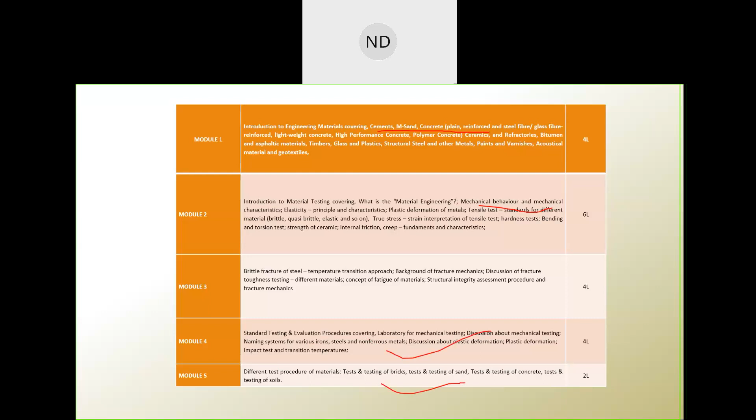Okay. So, wait, somebody is there in the lobby.

Okay. So, in the introduction, I have already said that in your first module we are going to discuss different materials which are used for construction, right? So, since in the first module we are going to discuss different materials, where is this thing?

Why it's not coming? Yeah.

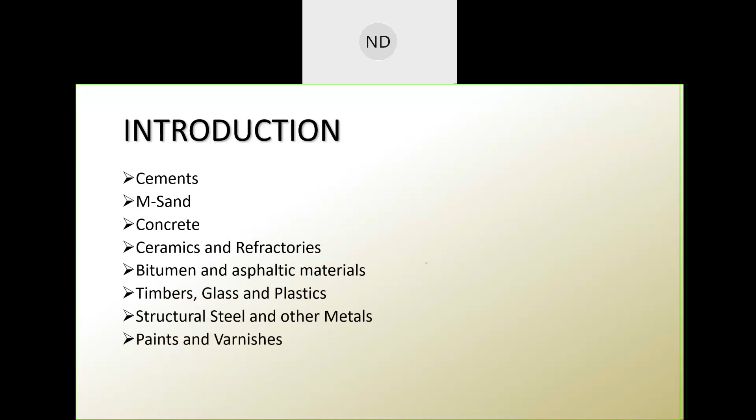So different materials like cement, where we will be talking firstly about cements, then M-Sand, concrete, ceramics and refractories, bitumen and asphaltic materials, timbers, glass, plastics, structural steel and other metals. Then we are going to talk also about paints, varnishes, acoustical materials and geotextiles. In the first chapter, materials, the first material which we are going to talk about is what? Your cement. So let me remove this.

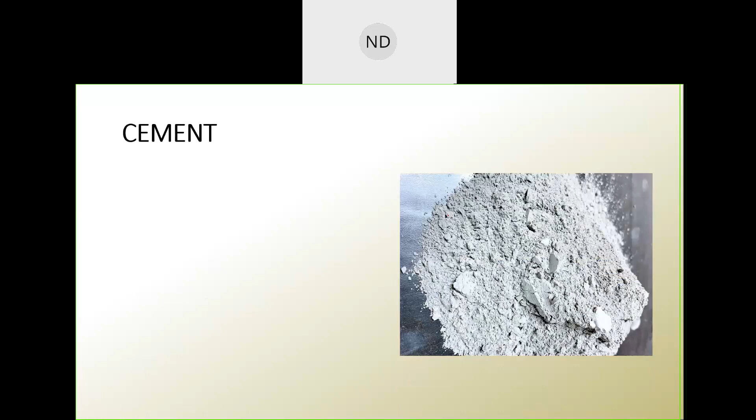So this is your cement. Being a civil engineer, you already know about cement, but we'll go in depth. What is a cement? Cement is a binding material, you already know from your labs also, which makes a bond between aggregates and reinforcing materials, between your steel and other materials, the mortar. With the development of technology, the quality and the types of cements have also developed.

There are different types of cements, grades of cement. Basically these cements are divided into different types for different construction works, because there is not only one cement. There are many different types of cements which are made for different purposes, for different types of construction. So next, what are the different types of cement?

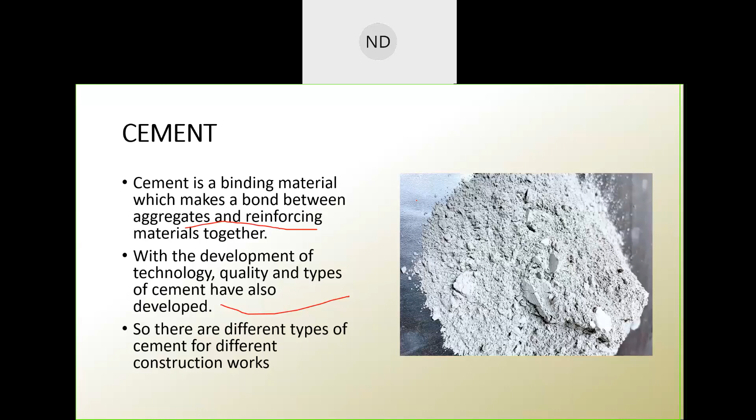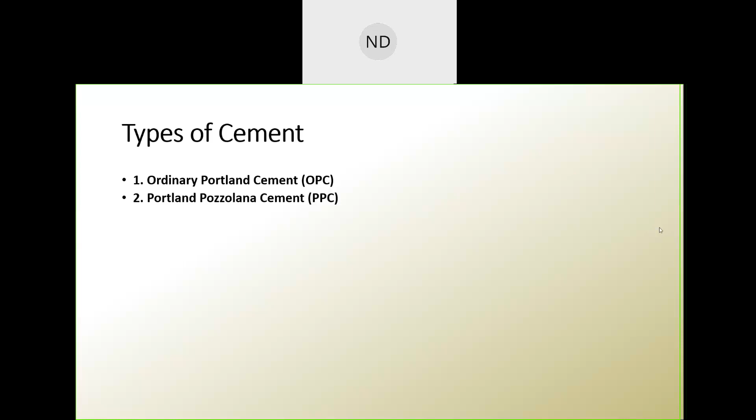There is OPC cement, which you know, the most regular one, ordinary Portland cement. We have Portland Pozzolana cement, PPC. These terms you'll always come across, because you'll be dealing with cement, concrete, reinforcements in your civil engineering. So you will have to know what the different types of cement are. These are basics. So OPC, PPC, Portland Pozzolana cement.

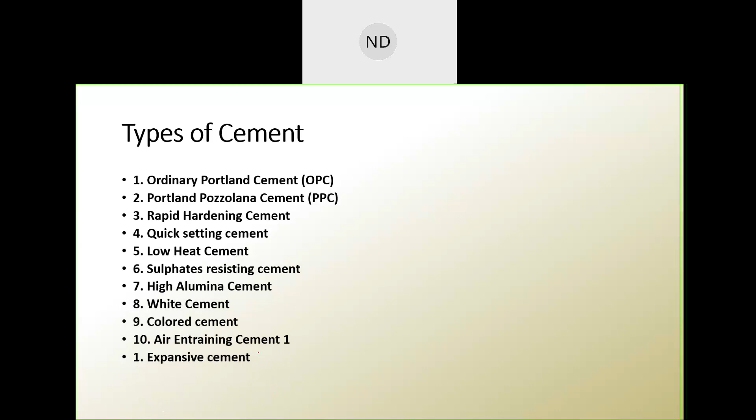Then we have rapid hardening cement, quick setting cement, low heat cement, sulfate resisting cement, high alumina cement, white cement, colored cement, air entraining cement. Expansive cement, this one should be here, this one is number 11. Expansive cement, hydrophobic cements. Now we are going to discuss all these types of cements, the first being the ordinary Portland cement.

Why are participants so late in their messaging now?

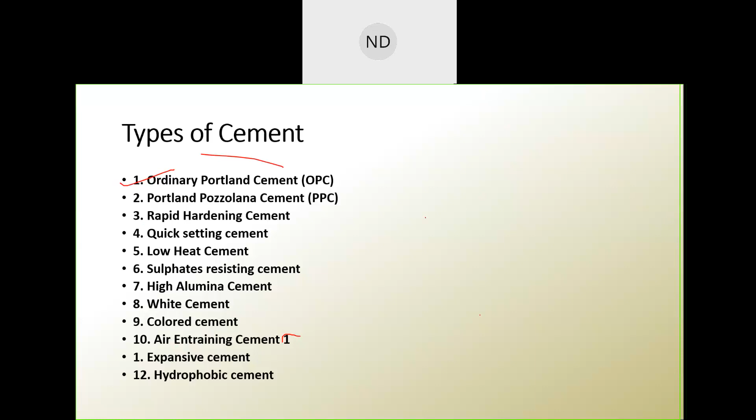So the first one is your ordinary Portland cement, which is also known as OPC. The ordinary Portland cement is the most usual one, which is used in all types of normal construction works. This cement is always used. For experiment purposes also, you can use this.

What is the composition of OPC? Argillaceous, or silicates of alumina, that means clay and shale. And also calcareous, or calcium carbonate, is present in OPC. It is the most used in ordinary and all usual construction works.

Where are they used? They are used for general construction purposes, as already mentioned. It is also used in most of the masonry works, like when you join two bricks together with the mortar, mixing cement with your sand and water. So those are your OPCs, used for basic, normal construction purposes and masonry works.

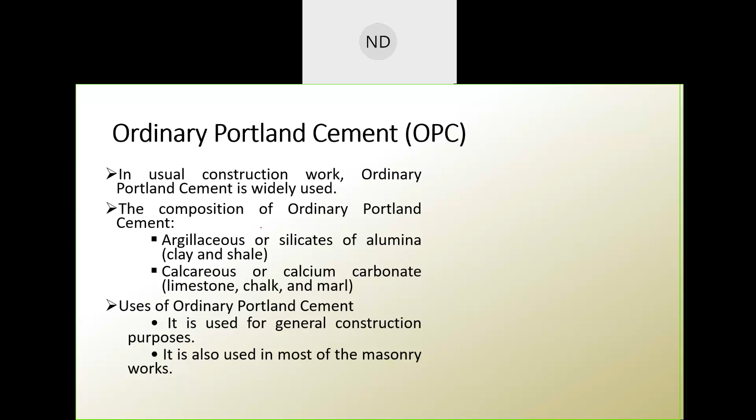Then we have our Portland Pozzolana cement, which is your PPC. You will come across PPC. PPC means Portland Pozzolana cement, and these are pozzolanas. So what are pozzolanas? Pozzolanas are natural or synthetic materials that contain what? Silica. This is the most reactive one.

Silica is present in your Portland Pozzolana cement, and this is the reason for the reaction. Silica in reactive forms, which is present in your pozzolanas, reacts with calcium hydroxide generated by hydrating cement. When your cement hydrates, when you mix water to it, it will hydrate, and at that time what will happen?

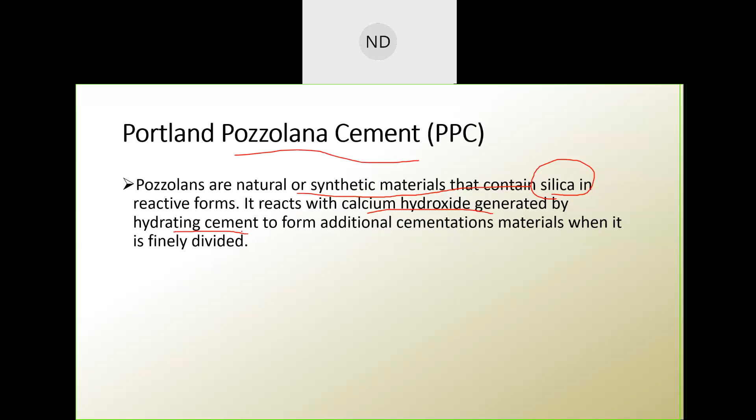When the cement is mixed with water, it will hydrate, and then it will generate calcium hydroxide. And this calcium hydroxide reacts with what? This silica. And after reaction, what happens? It behaves like an additional cementitious material when it is finely divided.

The composition of this Portland Pozzolana cement is what? OPC clinkers, gypsum is there, and pozzolanic materials like fly ash. It can be fly ash, volcanic ash, calcined clay or silica fumes. These are used to form Portland Pozzolana cement. Okay.

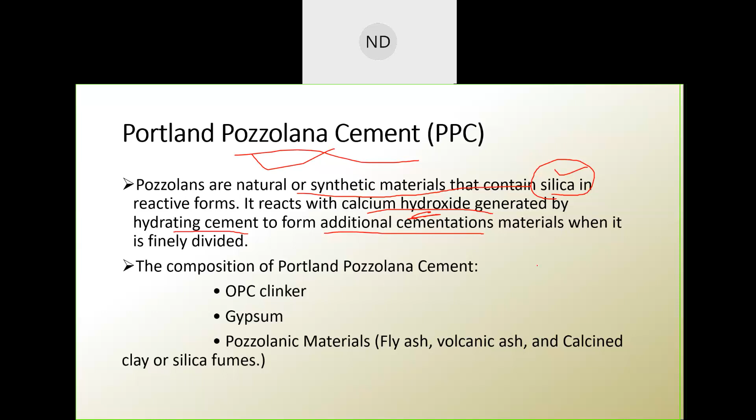So next, this was your PPC. The third one was what? Oh, sorry. Before going to the third one, we will see where these PPCs are used. Where are these Portland Pozzolana cements used? These are used in dams, etc. The hydraulic structures are there.

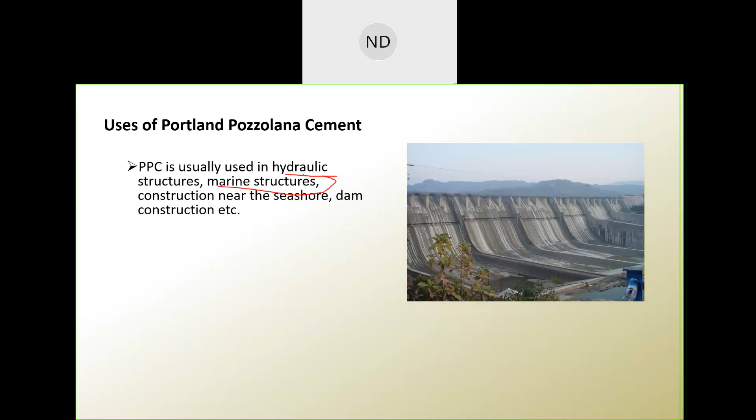PPC is generally used in what? Hydraulic structures, marine structures, which are basically in water, construction near the seashore, dam construction, etc. PPC is used in hydraulic structures, all marine structures where water is related. It is also used in pre-stressed and post-tensioned concrete members. Now, do you know what pre-stressed and post-tensioned concrete members are?

Anyone who knows what pre-stressed or post-tensioned concrete members are? You don't know? Let me check the chat. Sanjay.

Let me tell you what pre-stress and post-tension are. Suppose this is your beam. Generally, when load falls on the beam, what is going to happen? Different stresses are going to develop inside the beam. So due to this load, stresses are developed in this beam.

That means a time will come when it is unable to carry those stresses and it will fail, right? This is your normal concrete member. But what is pre-stress? In pre-stressing, suppose this is a beam. In this beam number 2, before any load is applied, what happens?

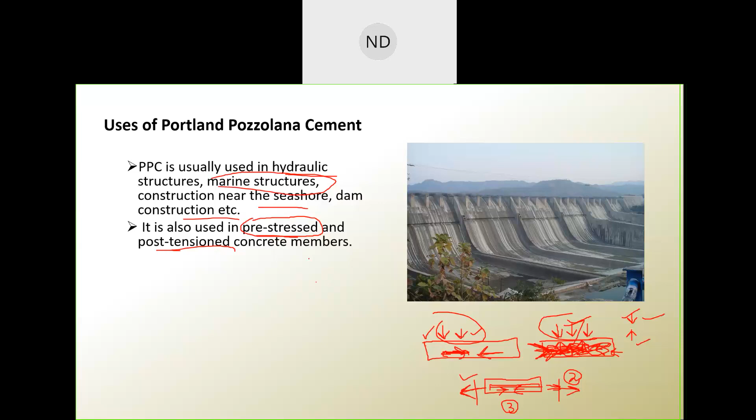So, there are two types, pre-tensioning and post-tensioning, that we'll talk about later. So the next point is, as it gives a better surface finish, it is used in decorative and art structures. Pre-stressed: you have maybe seen some members like beams and columns that are prepared already and then brought to the site. Those are your pre-stressed members.

It is also used in the manufacture of precast sewage pipes. All precast things: pre means before you go to the site, your member is already prepared and then brought to the site, whether it be beam, column, or any kind of member. So these PPCs are also used in these kinds of pre-tensioned, pre-stressed members.